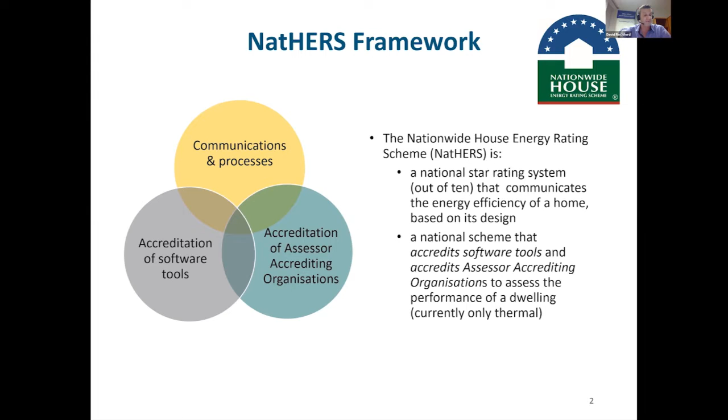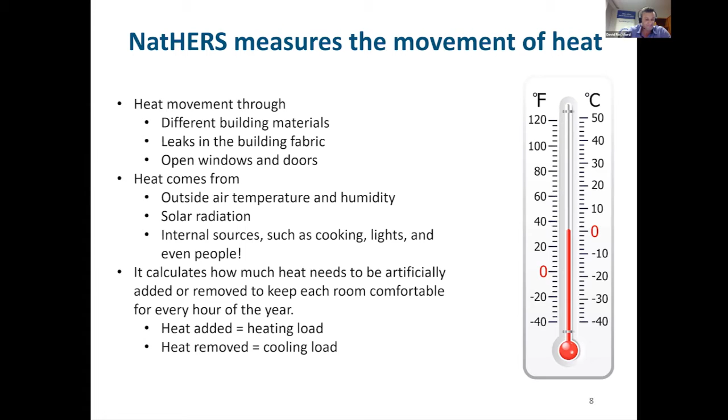Now, this is about the actual assessment process. If you're designing your house, your NatHERS accredited assessor will enter your home specifications into the software - things like what it's made of, its layout, what direction it faces, its address in the country, and what surrounds it, what's going to cast shadow or shade on it.

Now, NatHERS assessors are often called in to give the place a rating once the design is finished. However, it's really important to include them from the start so that they can help advise on climate and site-appropriate design features and materials before major decisions are made.

Good design generally doesn't cost any extra, as Anna said earlier. In fact, we'll give you a start - some free 7-star house designs as a starting point. My colleagues will post a website address in the chat for the Your Home website that contains a number of free 7-star house designs. There's designs in there for all of the capital cities that fine-tune it for the major climate zones of Australia. When you've got a chance, have a look at those designs and you'll see how easy a 7-star design is.

None of them have double glazed windows, for instance. It's just facing the house in the right way, putting the right size windows in the appropriate places, and appropriate shade, and 7 stars is actually very easy. Hopefully that'll come up in the chat and you can check that out at your leisure at some point.

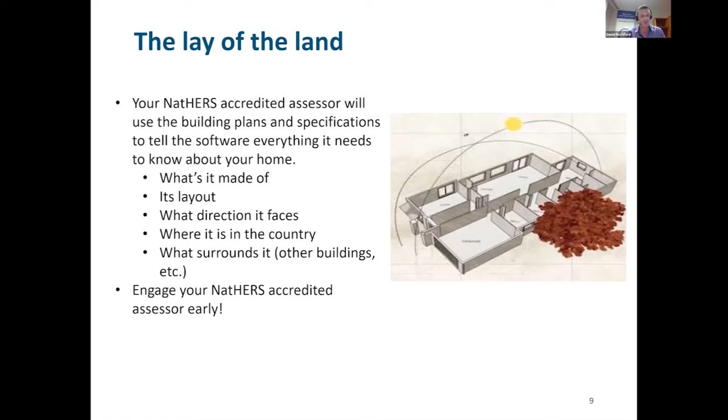Now, the other thing that the NatHERS software does is it sets out a schedule for every hour of your year and predicts how you will behave given the weather conditions at the time. We're all different, and this schedule is unlikely to accurately represent anyone, but it does standardize things so that ratings between houses can be compared.

Basically it allows you to compare apples with apples. It tells you how the house will perform with an average user, noting that a house may be used by different owners over its lifetime. So that's the first set of assumptions it has to make.

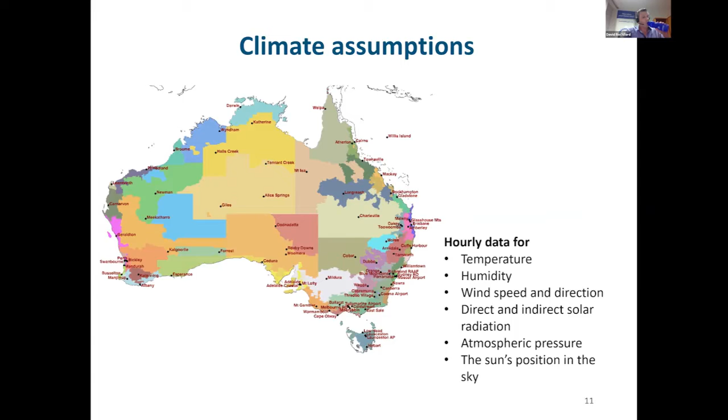All right, this is the first of the myths that I wanted to talk about: that NatHERS doesn't reward good solar passive design. This is probably one of the most frustrating ones I've heard, and from a number of people, and it just couldn't be more wrong.

NatHERS tools know exactly where the sun is for every hour of the year. They also know where all the relevant shadows are at any given time. So to get a good star rating, you must have at least some elements of good solar passive design. However, the star rating is about how much artificial heating and cooling is required. So even in a pretty cold place like here in Canberra, you can let in too much sun. It's basically about getting good amounts of free heat from the sun in winter and keeping it out in summer.

Furthermore, compared to an insulated wall, windows, especially poor quality ones, allow heat to escape relatively easily, especially overnight. So again, sometimes people forget that balance. Yes, you can get in all this great sun, but if it's all escaping through that flimsy glass all night, it may not be the right balance. So getting a NatHERS accredited assessor in early can help the building designer get these balances right.

Now, when it comes to shading devices, windows, awnings, those sorts of things, you need to think like the NatHERS software tool to get the best out of your home. In summer, when it's hot, use those shading devices to keep the sun out. In winter, when it's cold, open those curtains to let the sunshine in. But when the sunshine's gone and it's a cold day, shut them again to help keep the warmth in. NatHERS assumes that you will be an active user and use your house in this way.

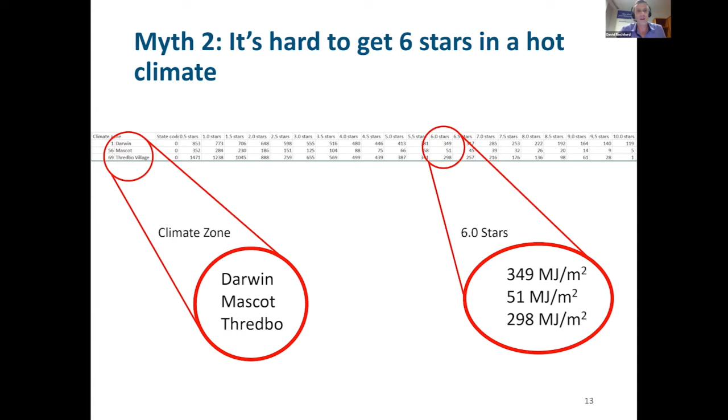All right, the third myth that I wanted to talk about was that NatHERS doesn't recognise that I like the heat. Well, considering that NatHERS tools have to make a standardised assumption about what temperatures make us feel comfortable, they'll never be spot on because we're all different.

So we assume that Darwin residents turn on the air conditioner in their living room when it reaches 26.5 degrees inside, while we assume the poor Hobart residents feel like they're going to melt once the living room gets much above 23 degrees. So this gives us another clue about how we can all act ourselves at home to make sure we are saving energy.

So to save energy and achieve the real potential of your home's rating, you've got to be careful with how you set your thermostats. NatHERS assumes that 20 degrees is warm enough in winter. So if you set your thermostat above 20 degrees, you're already starting to use more energy than NatHERS predicts.

Likewise, don't set your air conditioner thermostat too low in summer. NatHERS assumes that it would rarely be set below 25 degrees, depending on where you live. And essentially, the higher your air conditioner thermostat is, the more money you'll save. So there's some practical tips for you at home - make sure you're, again, acting like NatHERS tools predict you to, because you'll save a lot more energy.

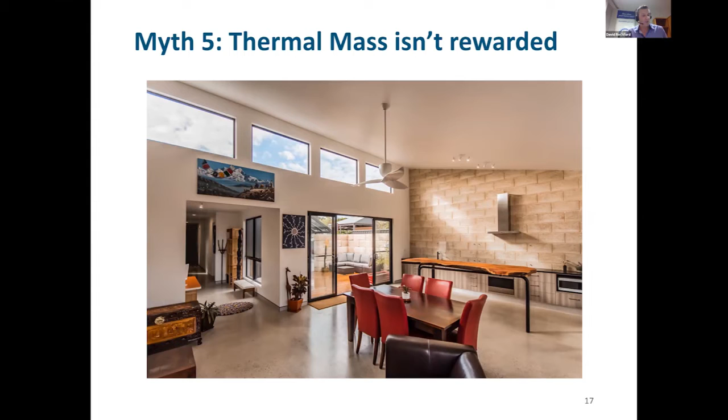All right, so my next session, and I'm almost there - this is about the future of NatHERS. I'll be talking about two elements in particular: the move to whole of home ratings and being able to rate existing homes.

Now I should explain a little bit about this trajectory and what we mean by zero energy and carbon ready buildings. Essentially, the government has not decided exactly what that endpoint is and when it will be. What the trajectory does is set us on the right path, because there are a lot of complexities we don't know the answer to yet. The trajectory sets us on a path where we start moving towards that vague goal of zero energy. We're not even sure exactly what zero energy will look like, because we still need to work through issues like how do you get a zero energy apartment when you've got no roof because you're on the first floor of a 50-story apartment block.

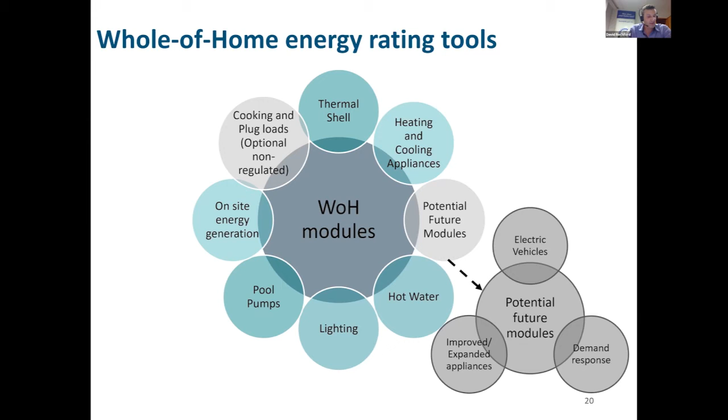All right, so that was basically it. I will be here for questions later, but I suppose thank you everyone. I hope you got something out of that. And I will pass back over to Anna.

My name's Anthony Wright. I'm the research lead for the Building Simulation Assessment and Communications Cluster at CSIRO, which gives me oversight of all the residential energy efficiency work. I'm going to talk about modelling, not rating, and a bit about the research and development trajectory that CSIRO is on at the moment in this space.

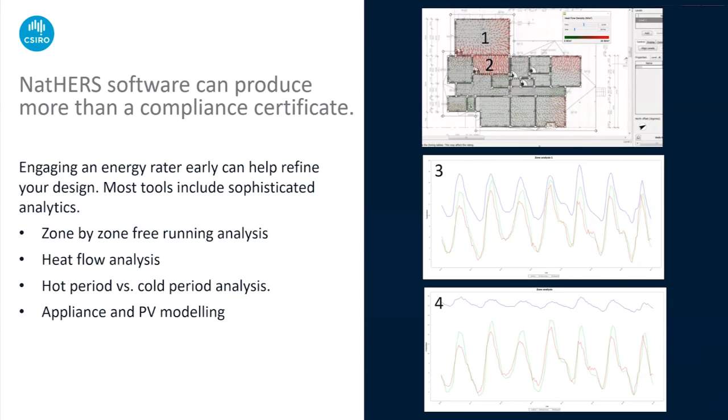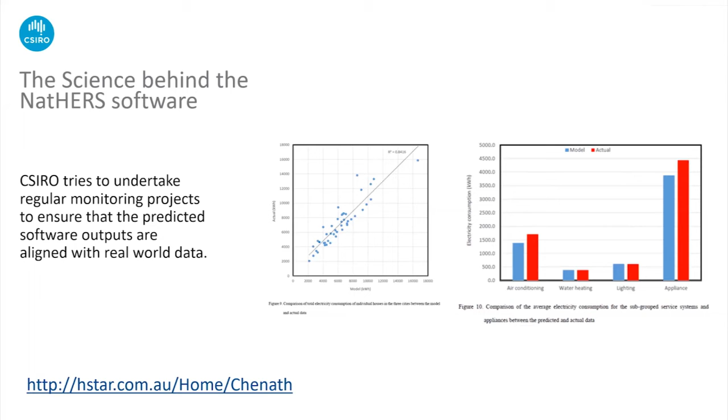We also undertake real-world studies to evaluate the impact of the NatHERS scheme - applying all of those behavioural characteristics, do we still lead to a reduction in energy consumption? Our largest study is quite old these days, 5 or 6 years old, using a cohort of 414 houses in Melbourne, Adelaide and Brisbane, comparing pre and post 5-star houses. 6-star hadn't been around long enough to analyse.

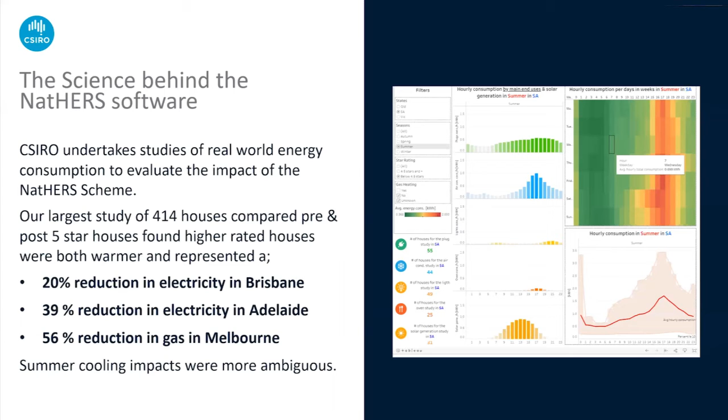So we do visualizations of all of the ratings that go into that system, and there's about 800,000 in there, stretching back about 5 years now. So you can really see how things have changed state by state, postcode by postcode, and really analyze the impacts of the NatHERS scheme. That data is also used by the NatHERS administrator, Dave's team, and their consultants, and the Australian Building Codes Board and their consultants to develop new policy and regulations and to make sure we're targeting regulations at the right things.

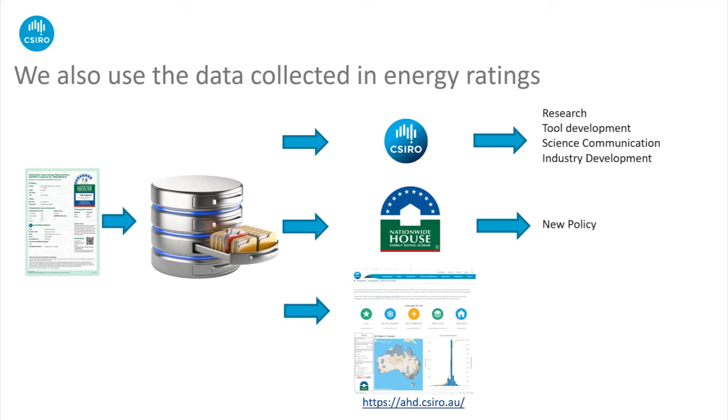We also use the data internally at CSIRO to do research and publish papers. We use it for tool development. We use it for science communications and for industry development as well. And sometimes this leads to interesting new insights.

So we asked the question of the data about 1.5 years ago: is new housing in low socioeconomic areas likely to perform worse thermally than housing in richer areas? Counterintuitively, at least for me to begin with, the answer was it seems that poorer areas might benefit disproportionately. The average star rating is higher in lower socioeconomic areas than it is in higher socioeconomic areas.

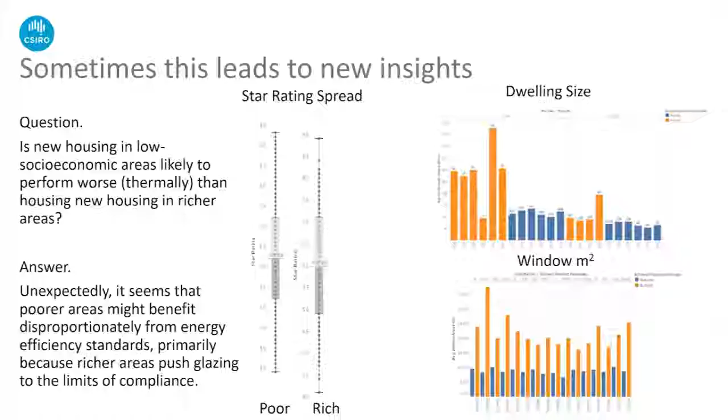We're looking at improving our concrete slab on ground modelling, particularly as it relates to the water table. This is something that's not done particularly well in any of the international software. We think we've got a world-beating model, but last time we ran it on a standard computer, it took about 4 days to do the model. So we decided that was probably unacceptable and are trying to improve the performance of that model now.

Overheating and Australian comfort standards. There's some evidence that the minimum standards are leading to some apartments in particular overheating in summer. One of the problems with that is that we don't have Australian comfort standards, believe it or not. We need to use the European ones. And as Dave rightly pointed out, what's comfortable in one place is not necessarily comfortable in another, and the European standards are not particularly appropriate to the Australian climate.

So developing some Australian comfort standards so that we could set those thermostat settings more accurately in the NatHERS scheme would be fantastic. Occupancy settings, we could probably tweak those and improve them. They are very hard to research, and you've got to imagine you have to look at how people use their houses in 69 different climates in a statistically significant way in order to arrive at appropriate occupancy settings for the whole country.

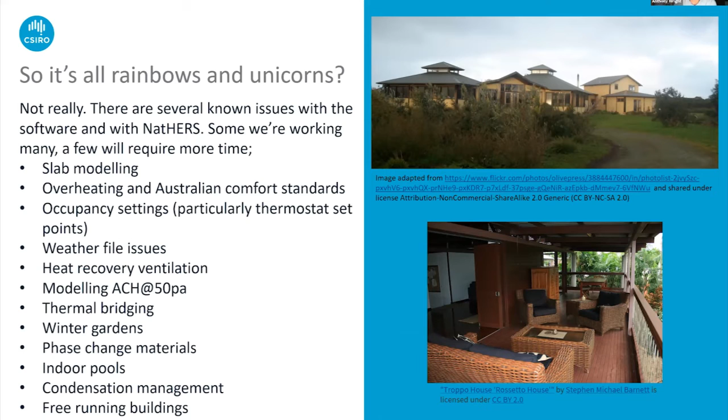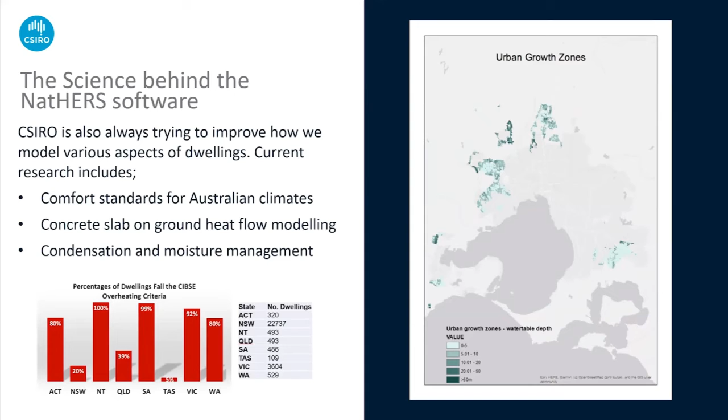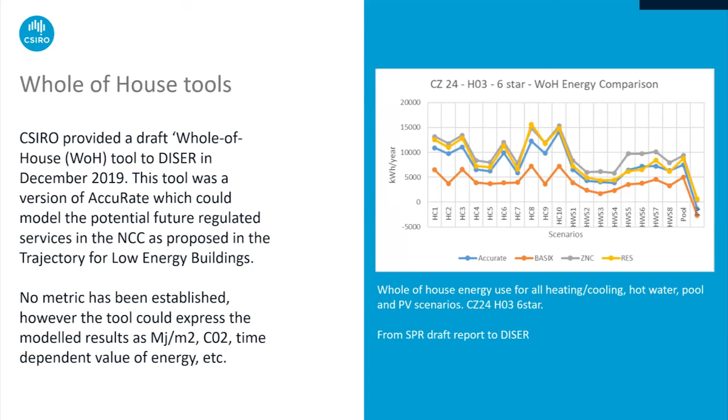So what else does the future hold? We are building whole of house tools for Dave's team. He's already spoken about that, so I might move on and try and answer those questions in the question area.

We are putting our benchmark tool in the cloud. We released an alpha version in May this year, and a beta release to AccuRate users will be available next year. That will allow us to do API development with a range of different front-end providers.

For policy development purposes, we will be able to dip into our database of ratings and draw out, say, 10,000 houses and ask what would happen if we insisted that the insulation in the ceilings on all of those houses was R6. We can look at the impact of that policy decision on a geographic area or a type of housing. So we get much more targeted policy and the ability to have better, cheaper regulations.

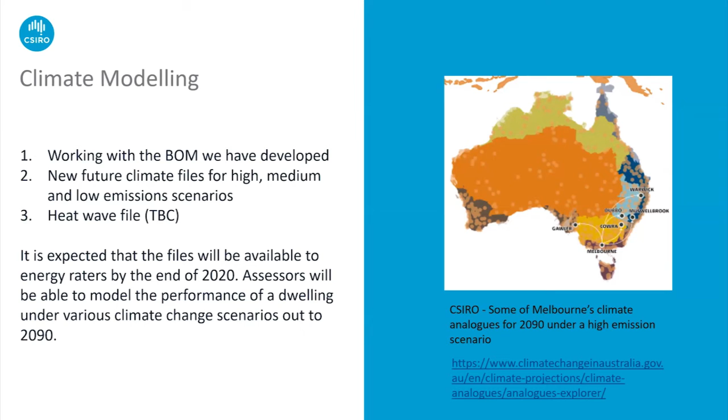For existing housing, all of the advances I've just talked about will be available in the models we are developing, such as Magicplan and the neural network, to make the rating of existing houses much faster and correlated with the NatHERS software. At the moment, it's prohibitively expensive to do a NatHERS rating on an existing house because you need to draw up the plans. We hope by the end of next year to have solved that problem.

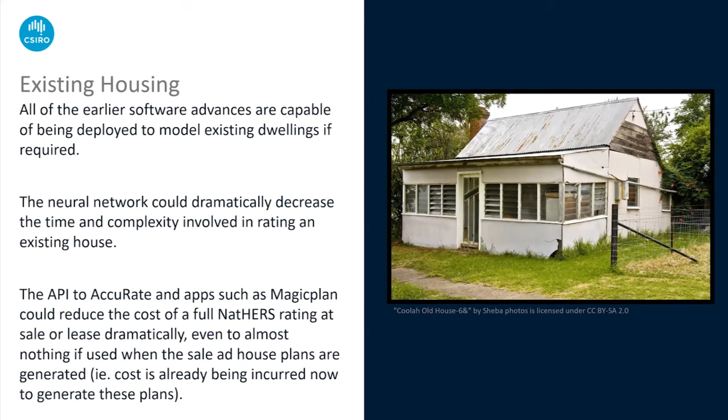So that's it for me. That was very fast, I appreciate, and I'm still over time, so I will hand back to Renew and hopefully be able to answer some of your questions.